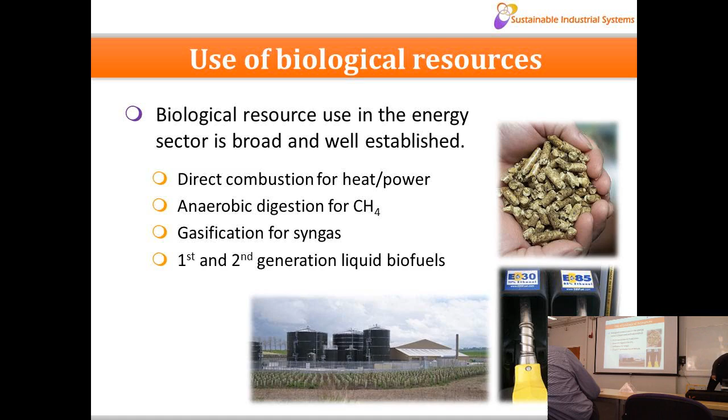But there are quite a few questions that we should ask from that. For example, if our goal is to try and replace fossil fuel derived things in general, then what about chemicals and materials? So, okay, we can replace all energy with biomass based products, but what about chemicals? Most of the things we use in daily life contain petrochemicals, whether it's shampoos or cosmetic products or food products. Materials, the vast majority of plastics, which are used in pretty much everything, are petrochemicals. So what about replacing some of that as well? To what extent is that possible?

Another question might be, does bio actually mean sustainable? I think we are mostly guilty of falling into this assumption that if the word has the bio prefix at the front of it, it is green. Is that actually the case? Are we sure that it is? And I think that's quite important, because if we're not careful, if we put across new concepts that we claim to be green, and then we later find out that they're not as green as we thought, then the danger is that we disenfranchise lots of people from the whole idea of being environmentally friendly in general. So we have to be quite careful and quite robust in making sure that what we're doing is actually sustainable.

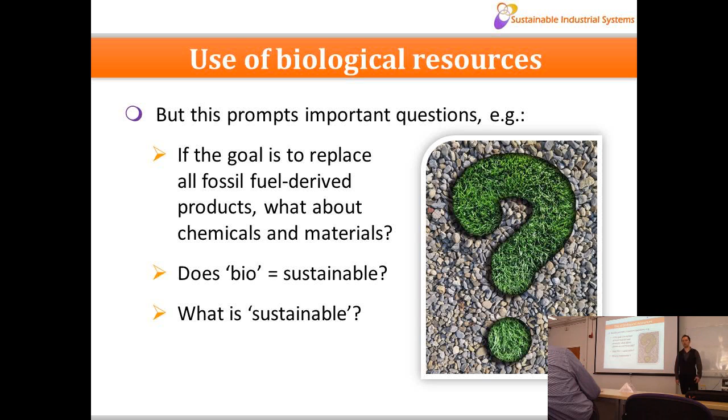And what does sustainable even mean? Because it's one of those words that is thrown around a lot without much clarity sometimes. So, sustainable development, I'm sure you've heard this 1,000 times. This is the generally accepted definition of things that are sustainable.

We're talking about development that meets the needs of the present without compromising the ability of future generations to do that themselves. So that's all sort of nice, we can all get behind that idea, but it's a bit difficult to work with: what does it actually mean? So normally we talk about it in terms of these three dimensions. It's trying to make some kind of rational, reasonable compromise between impacts on society, economic viability, and environmental impacts as well. So that's what we're trying to aim for here.

The problem with that is that it throws up a whole pile of issues, because ideally we don't want to come up with something that is beneficial to one of these three areas, but causes significant detriment to others. Similarly, we don't want to come up with an idea that is, let's say, socially beneficial in the part of the life cycle that we're looking at, but then causes all sorts of social problems elsewhere. Similarly for economic problems and environmental ones as well.

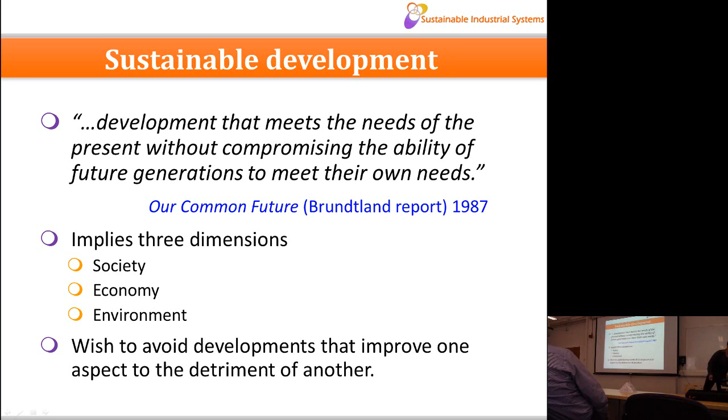So, in order to try and approach these things robustly, one of the things that we try to encourage is this idea of life cycle thinking. You may be familiar with this stuff already, so I'm just going to run through it quite quickly. Typically, when we are looking at developing new processes or products, we look at the bits that are kind of obvious, the bits that we're actually working on. So that could be the production process itself, if we're developing that, or if we're consumers, then we probably look at the bits that we see in the shops. You're going to buy a product or a service, and then use that product or service, and eventually some kind of disposal. We don't really think about the other stuff that happens.

Of course, behind the scenes, there's all sorts of stuff happening. So it's not just the process that we're developing or the product that we're buying, but in the background you're having lots of different resources being extracted from all over the world. You are having to transport those resources to various different processing steps, more transport to consumers, more transport to waste, to some kind of recycling and recovery processes, and ultimately to final disposal as well. And all of these things have consumption of resources, economic costs, social impacts. Could be things like negative health impacts, for example. But on the plus side, they also provide benefits like services and employment, that kind of thing. Economic benefits, obviously, and sometimes positive environmental impact as well.

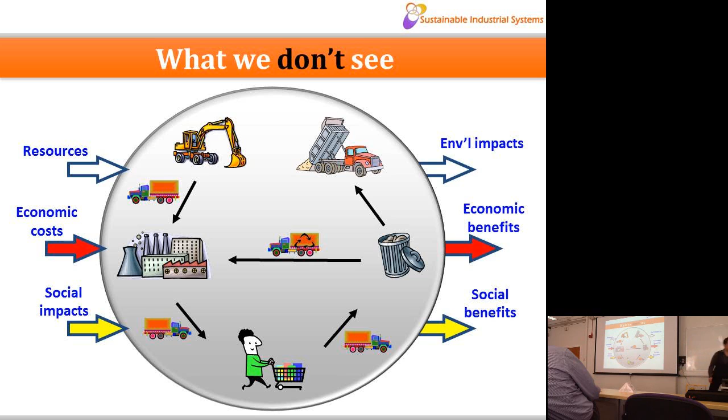So, what we're trying to do is to take account of all of this by the idea of life cycle thinking. Now, that's partly established in certain areas, but not well established in others. So, when we think about the environmental part of those three areas I talked about before, LCA, life cycle assessment, is very well established. This is the kind of thing that we can use during process development and assessment. So that involves quantification of environmental burdens, so that's emissions to the environment really, use of energy, use of materials as well. Quantification of the impacts of that, so trying to translate those burdens into impacts, because of course if you say, okay, we have a direct emission of such and such a chemical here, that's not necessarily helpful. You have to translate that into an actual environmental impact that we can have a look at.

And one of the most useful parts is to identify opportunities where we can improve things. That's particularly important when we're developing new processes. If you can do some kind of rough life cycle assessment, you may be able to point in the direction of making major improvements by saying most of our impact is coming from this particular bit, so let's see if we can improve that a little bit and build life cycle assessment into the development process. You can also use this to compare different alternative products and different scenarios, that kind of thing as well.

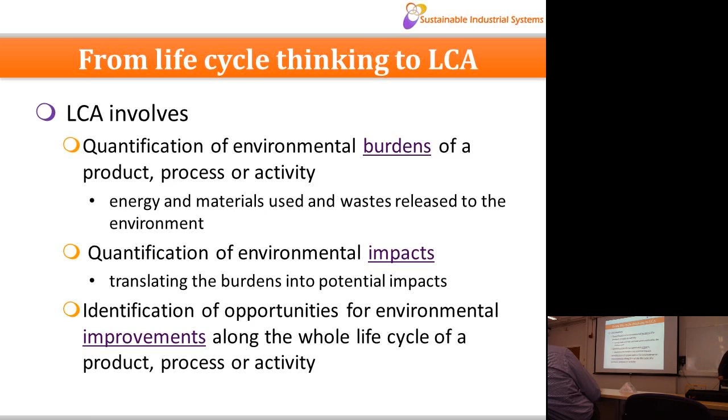The second one is to collect lots of data, so that's mostly things like the resources you're using, the energy consumption, direct emissions, that kind of thing. I'm sure you can imagine that when you're trying to model something like this, as I said, it's a big life cycle of things happening all over the world, it's kind of impossible to do the entire thing yourself with a huge data requirement. Luckily, this has been going on for quite a long time already, so there are databases that exist. So, for example, if you are developing something that requires a steel vessel weighing 100 kilograms, there's already been life cycle assessments of steel manufacture with various different conditions and steel working and that kind of thing. So if we know that's what we require, we can plug that LCA data in to this data collection section to help us model the final product.

And then you've got the impact assessment, which is where we try and turn these resource uses and emissions into environmental impacts that we're familiar with, like global warming, that kind of thing. And then the final bit is basically run this iteratively, have a look at the results, see if you can improve any bits, see if you satisfy your aims from the start.

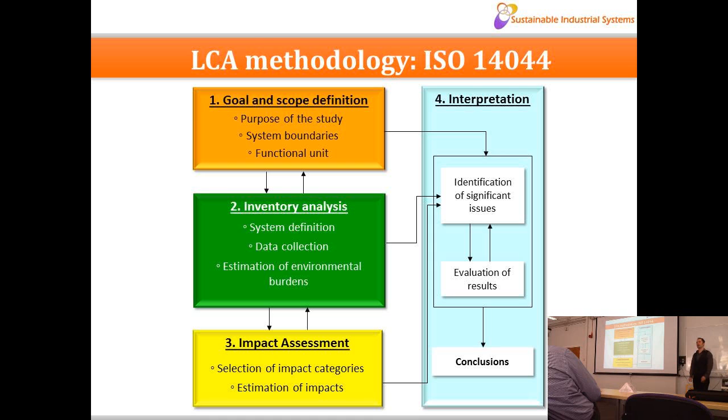So that's all I'm going to say on how LCA actually works, but of course I'm going to answer more questions about it. I thought I'd move on to a bit of an example within this area to give you an idea. So this is a project that we completed towards the end of 2015. It's looking at using lignin as a resource for industrial chemicals.

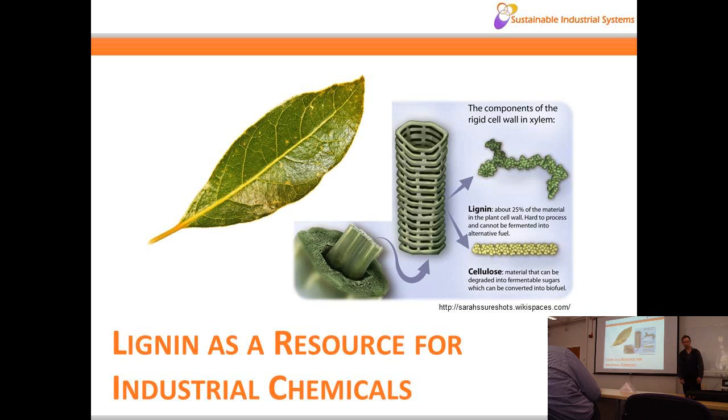I'm sure you're all familiar with lignin. It's about 25% of the mass of plant cell walls. It's very difficult to use. It's a structural component, so it's very difficult to degrade, quite tough. But there is a lot of it. There's lots of ways of using lignin, and we don't really harvest it very well at the moment. We don't really harvest it at all. So it's quite a good resource there.

So this project was called Bio-mimetic. It was an EU FP7 framework project that finished towards the end of 2015. And the aim was to develop and test production methods and use cases for polymers created from renewable feedstocks. The emphasis, as I say, was on lignin, because firstly it's one of the most abundant organic polymers on Earth. It's also the most abundant phenolic polymer. As I'm sure you know, phenolic compounds tend to be quite useful chemicals. So we can harness that and do something useful with it, and it's potentially a great resource.

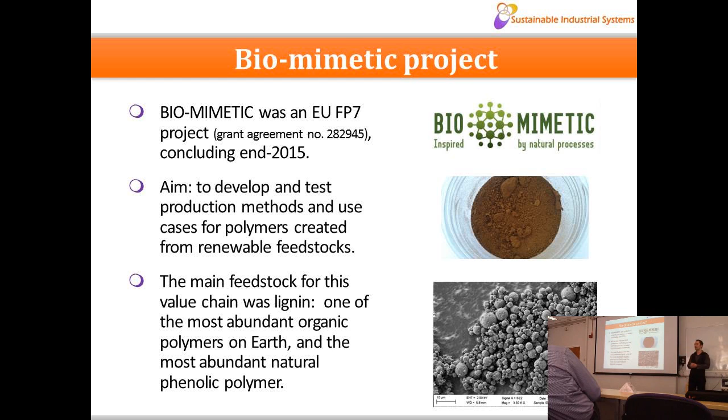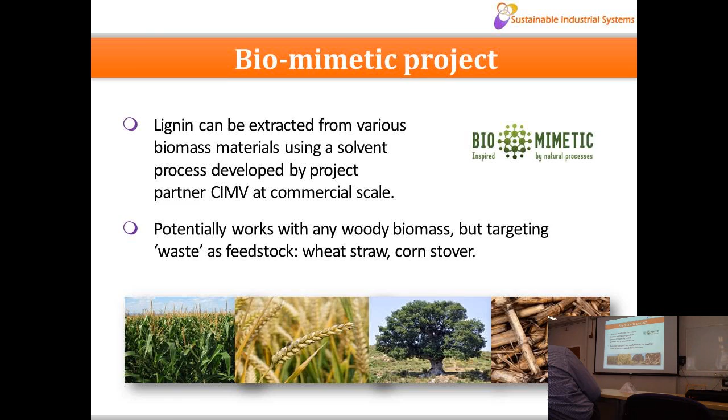So you can extract lignin from basically any kind of woody biomass because it's the structural component. This part of the study was by a project partner called CIMV in France. So they developed an organic solvent process, which is now more or less at a commercial scale. So you use that to extract the lignin. As I say, potentially you can use this on anything. We were looking at wheat straw and corn stover because they were quite readily available in the geographical area, and also they came up with lignins that have the characteristics that we use in the next stages. So that's where we're getting our lignin from. So as I say, we're trying to use waste products instead of competing with food.

And this is the overall system boundary. So in life cycle assessment, we try to be quite careful to draw this system boundary so it's clear exactly what we're including and what we're not. And this is the whole sort of value chain, if you like. So at the start, we get the corn stover cultivation and harvesting. We then extract the lignin from it with that organic solvent process. And then we functionalize that lignin with an enzymatic process, carboxylation via enzymes. So we have to include producing those enzymes as well, and producing the molecules that we're using to functionalize our lignin. Then you've got the use of the biopolymer in any product, in this case in detergent products. So the project team was led by P&G, leading solutions and products. So that's the general overall system boundary that we're looking at here.

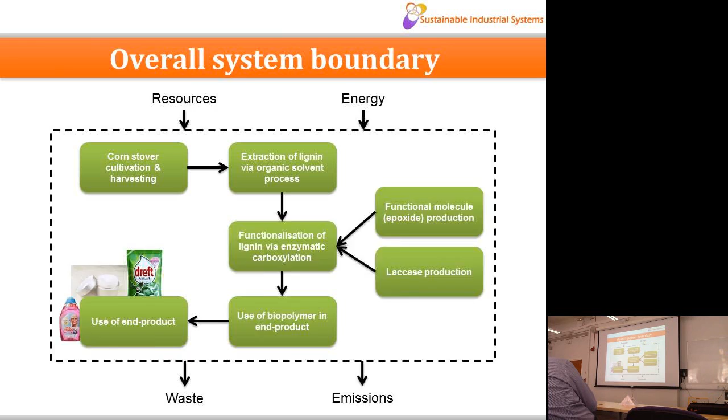So if I can give you a bit of an example of what you come out with actually doing an LCA. So if we look at just the first section for a starting point, getting the corn stover, extracting it, transporting it, getting the lignin from it. This is our first part of the assessment. So we ran a life cycle assessment on that, collected all the data on the energy, resource use, the chemical use, etc. And this is what we came out with.

So you can have a look at various different environmental impacts here. These will vary depending on kind of methodology that you use. I'll point you to a few. GWP is global warming potential, the one on the carbon footprint, so I'm sure you're all familiar with that. All these other things are kind of similar, so you're probably aware that the carbon footprint, the idea is that there are lots of different greenhouse gases with different impacts on global warming. And the idea is that you're trying to make them all equivalent to carbon dioxide.

So methane, for example, is roughly 30 times as potent over 100 years as CO2. So if you have an emission of methane, you basically just multiply it by 30, and that makes it equivalent to CO2. So then you can remember the carbon footprint, which is expressed in carbon dioxide equivalent per whatever your unit of assessment is. These other impacts do the same thing, but for emissions that cause different types of environmental impact. So here's acidification potential. You're probably familiar with acid rain and acidification of water, that kind of thing.

Eutrophication potential. Freshwater aquatic ecotoxicity potential, so that's emissions of things like heavy metals and other toxic compounds in freshwater. Over here you've got the same things in marine areas. You've got human toxicity, ozone layer depletion, photochemical oxygen creation, so that's photochemical smog, the kind of smog you get in industrial areas from emissions from transport and fossil fuel combustion. Terrestrial ecotoxicity potential, and over here we have depletion of resources as well, so depletion of elements and depletion of fossil fuels. So you run the LCA, you build your model, and basically press go, and this is the kind of thing that comes out.

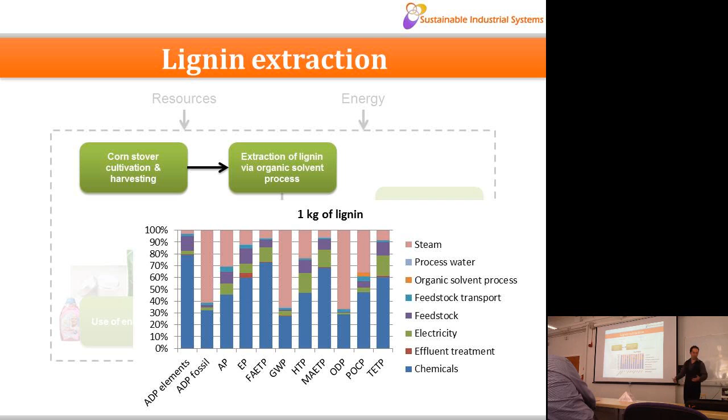Conversely, it would also point in the direction of saying, okay, there are certain bits here where we don't really need to make too much effort, like the solvent process itself, the direct emissions from it don't really cause any significant impacts on the life cycle, so let's focus on some of the bits instead. So that's the kind of way that you use LCA when you're doing these kind of new processes.

A few things to think about in terms of general biological processes like this, problems that will crop up in lots of different scenarios, not just in this particular project, but others. Biological processes tend to have a lot of multi-output systems. So to take our example here, we would take a biomass and get a lignin. But of course, biomass contains lots of other stuff as well. Cellulose, hemicellulose, it contains various non-sugars, it contains different types of silica depending on the feedstock as well.

So you've got lots of things coming out of the process. And what you do with those things can then affect the sustainability of the process as well. So one of the nice things about this is that we can run lots of different scenarios to explore what if we use this byproduct for this, or use it for this instead, and we can see what happens.

So the non-sugars we explored as well, potentially you can use some of those for cattle feed and kind of things. There's different scenarios of things you can do with byproducts, and this allows you to explore those options and see what the most sustainable is.

Other questions that are thrown up by this project and apply to pretty much all similar projects. Is waste actually waste? So I've said that we want to generally use waste rather than things that compete with food, but quite often things that we think of as waste aren't really, but do have some kind of function. So if you're using something like this, we talked about extracting corn stover in some crop field. If we take that away, there are consequences. If we take all of it, you could have some soil erosion.

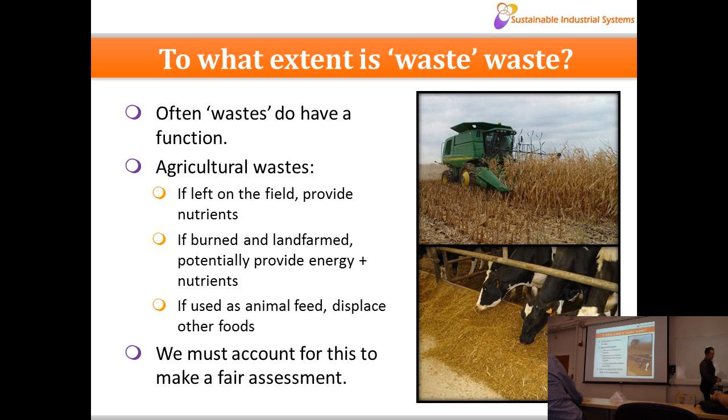So you have to try and be as comprehensive as you can and think about the actual impact of extracting this stuff, because quite often wastes are not 100% useless. So to make a fair assessment, we have to account for this. So we did. It means it's a bit more complicated to model, but it's going to do it.

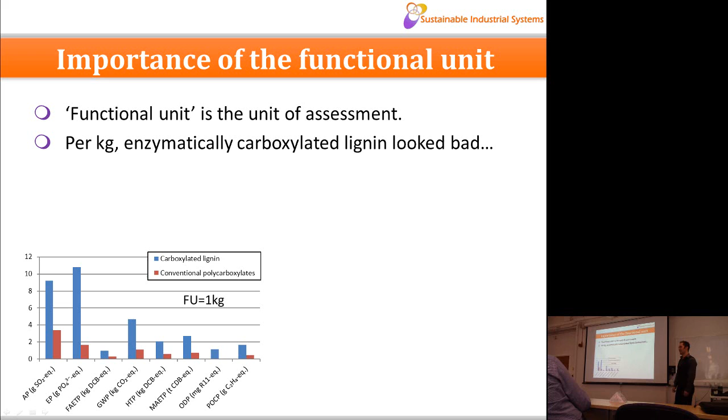But once we had this more or less complete model, we were looking at it per kilogram of product. And this was carboxylated lignin, the idea being to replace polycarboxylates in detergents. So we thought, okay, let's compare a kilogram of our product to a kilogram of polycarboxylates. And we did that, and it all looked a little bit scary because our product was worse than the conventional polycarboxylates. But then luckily, there was some lab work done which found that actually it's more effective than conventional polycarboxylates. So this was a very lucky coincidence that meant that we would use 20 times less.

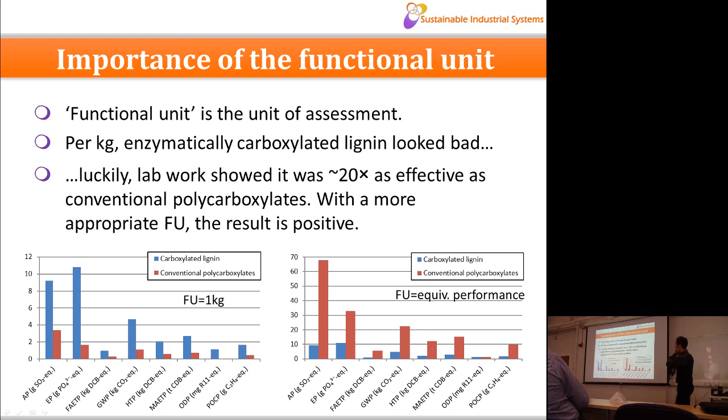And so that's pretty much all I was going to talk about really. I guess the outcome I would say from this is that it does seem to suggest that lignin is quite a promising feedstock. There's so much of it, and there are things that you can do with it that appear to be fairly environmentally sound. This only focuses on one enzyme group, on one type of functionalization. You can do all sorts of good stuff as well, so there's a lot of ongoing work there.

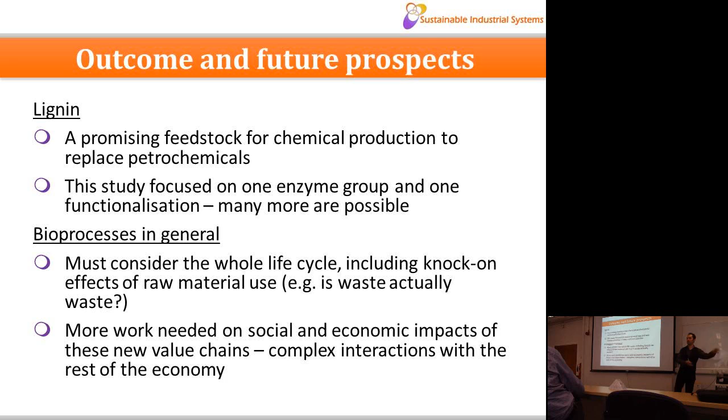But what we can learn from this in terms of bioprocesses in general, we do need to consider the whole life cycle, including the knock-on effects of things like using waste products as well. Otherwise, it's not really going to be fair. And we do need to also consider those bits that are not talked about, like social impacts, effects on employment and health and that kind of thing, rural communities potentially, economic impacts, all this stuff needs to be looked at as well, to get a sense of whether we're actually doing something that's genuinely positive or has a load of sort of knock-on detriment that we've got out of that. So I think that is pretty much everything.